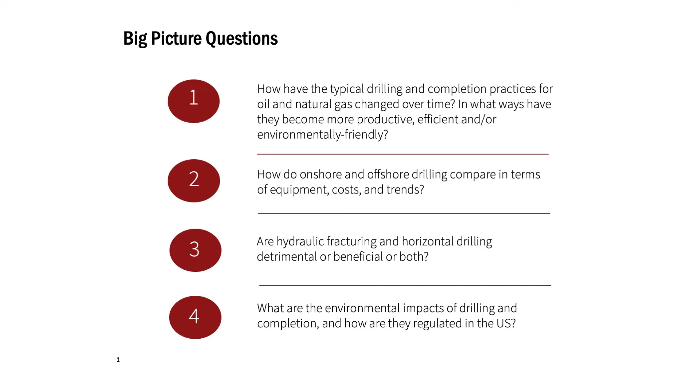So these are the kind of questions that we want to ask. Certainly, environment is front and center. Understanding and contextualizing where drilling takes place in the world. And we've already talked about the fact we're the largest consumer and largest producer of oil and gas in the world. So it makes sense that a lot of the action around drilling and the environmental impacts are in the United States. Not completely, but the good news is today we have really rigorous regulation. Staffing it, like everything else, is not always what we'd like it to be.

And we're going to dig in and look at the offshore environment. So this is talking to kind of contextualize, who are the players? Because there's different roles. Some of you have heard of companies like Halliburton and Schlumberger. When I was growing up in the industry, we called those service companies, oil field service companies. They really focus on the completion side of things. There are companies that just specialize in the drilling, so BP or Exxon might hire them to be their drilling contractors. Nabors and Liberty are two examples of those kinds of companies.

So it's just segmenting the market a little bit, and then giving you a sense of globally who are the biggest global producers, in this case of oil, and ranking them and giving you a sense of things. I spend a lot of time in Oklahoma City, and there's a company called Chesapeake that doesn't even make the list here that is a big producer largely of natural gas. But this gives you a sense of some of the names, hopefully, that you recognize and who's relevant and important.

Also on this slide, we wanted to give you a sense of how many feet are drilled per well in the lower right. It shows you that horizontal well bores or directional well bores have much longer length to them, and a lot of that length is horizontal. Most horizontal wells start out drilling vertically, like 5,000 to 8,000 feet. And then I still can't understand, honestly, how the steel drill stem bends in the subsurface. But computers and physicists and engineers figure it out, and they have special motors on the drill bit that cause it to be steered, and sensors associated with that.

So we're going to talk about drilling now. This is Kemp Gregory, who leads Renewwell, which I mentioned before. He worked for Shell and is up in Alberta. It reminded me that I spent three winters on the Blackfeet and Crow Indian reservations managing drilling operations. I had what I called a spacesuit - I wish I had a picture of myself, because I could barely move in it. It was both for safety and because it was about 30 degrees below zero, super cold. So the environment of a lot of drilling activity, at least historically, has been pretty rugged.

One important thing to realize is that hydraulic fracturing has a nickname, fracking, which the coal industry put on it because it sounded a bit like another F word. That doesn't mean hydraulic fracturing is perfect, but from a technical point of view, what we've been doing - which Halliburton pioneered back in the late 1940s - is creating an artificial fracture system beyond what occurs naturally, creating permeability. Remember we talked about conventional and unconventional reservoirs. This is about the geometries of wells, not hydraulic fracturing itself, but I wanted to show the timeline. We first started hydraulic fracturing back in the late 40s.

We married the technology, and did it in vertical wells. But a big breakthrough happened in the early 1990s - I was in the gas industry at the time, and I actually knew the head earth scientist for Mitchell Energy. He called me and said, 'We've done it.' It was a really exciting time because they drilled their first horizontal well and combined it with hydraulic fracturing, like we showed in the Shell video. So this horizontal drilling phenomenon is about 30 years old - when they first did it, it was like the beta version.

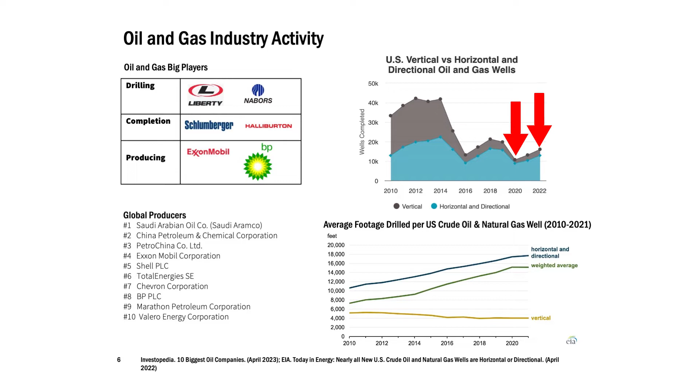It took a while to take off, but over half the rigs were going horizontal by 2008, and if you look at 2017 and beyond, we've been operating in a world where 80 to 90% of all drilling is horizontal. This is mainly because it has much less surface impact for the amount of drilling you need. In a vertical well, if you have a rock layer 100 feet thick, you only drill through 100 feet. But in a horizontal well, you can drill through a mile of it, since a common lateral length is about a mile. So the amount of reservoir you can reach is much greater with a horizontal well, meaning you need radically fewer wells. That's why we're drilling so many fewer wells in 2020 and 2022 than we were back in 2010 - horizontal wells are so much more productive that you need way fewer of them.

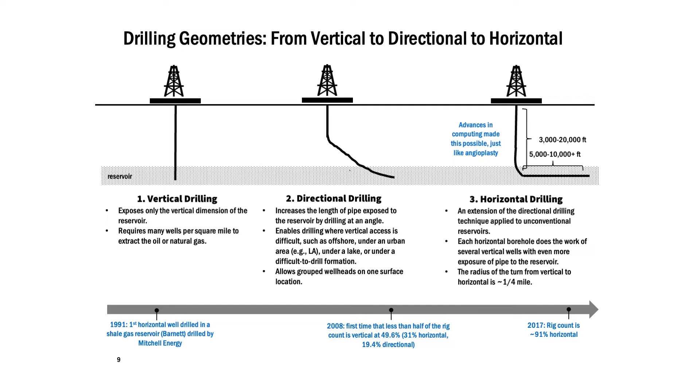One of the first areas we pioneered directional drilling was in urban places like Los Angeles, where there are literally buildings that at first you'd think are office buildings, but are actually cloaking drilling rigs that have directionally drilled wells under the city of Los Angeles.

The other place where we pioneered directional drilling was in offshore platforms, where we didn't at first go down vertically and go horizontal. What's allowed us to go horizontal is computing power and the ability to steer the bit, and to have sensors and controls and manage things.

The whole process of a directional well or a horizontal well, the pathway of that drill bit is highly regulated. You have to permit the path of the well, and if you go off permit, you have to stop drilling and go through the regulatory alignment, because part of it has to do with the mineral rights, and part of it has to do with just the management of the whole process. So it's very carefully monitored, not just at the surface, but in the subsurface. What's the pathway that well is going to take?

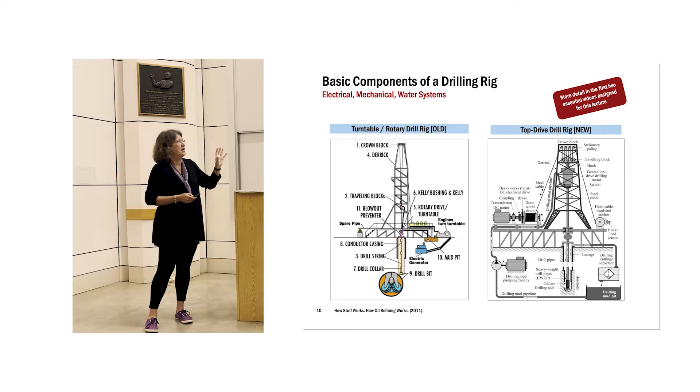So our main goal is that you understand these three different geometries of wells and how things have evolved over time. Drilling rigs haven't changed too much in terms of the fundamental systems. A new idea is actually putting the electrical in, and this top drive system is kind of an evolving technology that's here just for people who want to geek out on it, but I really don't need you to be accountable to know about it. But in the notes of this slide, it explains and reminds you what the fundamental systems of a drilling rig are.

How big do you think a drilling rig is for a reservoir that's at 5,000 feet versus a reservoir that's at 15,000 feet? Do you think the drilling rig would change size depending on how deep you have to go? The answer is yes, because the drill pipe is super heavy, and you need a bigger structure, just structural engineering wise, to support it. The deeper you're going, the bigger the rig you need, basically, to support all the weight you're managing of all the drill pipe you're pulling up.

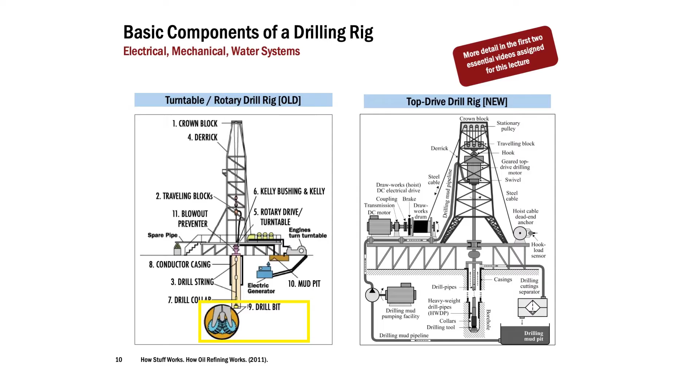So I'm going to start the process. You see it's highlighted, the drill bit. This tri-cone bit, the design of this was pioneered by Howard Hughes, who some people refer to as the Elon Musk of his day. Howard Hughes was into aerospace, medicine, the film industry, many, many things. But he is responsible for a lot of patents and designs around things in the oil industry, and Baker Hughes, some of you have heard of as an oil and gas service company, that's all tied to Howard Hughes.

Everybody, I've never had anyone get injured as we pass this around class, so let's not have it be today. But the idea, as Justine's showing, is...

The drill pipe screws into this bit, and the drill pipe is hollow, and the drilling mud is going at very high flow rates down the drill bit, helping keep the bit cool and lubricating the bit and helping move the cuttings up to the surface. And so that tri-cone bit gets very, very hot because it's grinding through rock.

When you think of the economics of drilling, and this could be for geothermal, oil, gas, drilling wells for water disposal, or for carbon capture, you want to make hole. You want to drill as quickly as you can without any kind of structural or mechanical failure. And so drill bits are really important.

When I was out in the field, 30 plus years ago, if you were drilling, you would buy the bits, and then when the bits became ineffective because the rock layers change and you didn't have the right bit type, you'd have to pull the bit out of the wellbore—that's called tripping the bit—screw on a new bit, and go all the way back down with it.

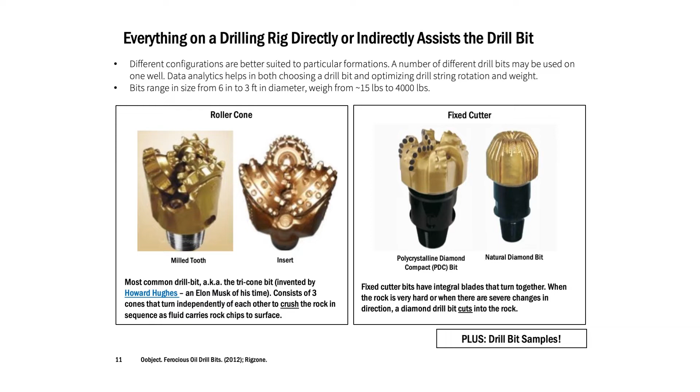So there's a little bit more. There's the bit on Howard Hughes. There's a fair bit about him in the notes. This is just highlighting that there's different kinds of bits. I'm not holding you accountable to know a lot about drill bits. It's mainly just to recognize that if you want to drill for geothermal, if you're working for Fervo, or if you're working for Chesapeake or Devon - and for Nate, who's from Oklahoma, Mitchell Energy is based in Texas, it got acquired by Devon, that's in Oklahoma City. So along with Chesapeake, Devon and Chesapeake are the two big operators based in Oklahoma.

There you go. What's class without a really cute little animation showing you the circulatory system? And again, on this slide, for your benefit, there are a lot of notes about this that are really just there to help you, not that we're going to be testing you on. But the thing that is relevant about drilling mud - it was a big wake-up call to me as a petroleum geologist when I went out to well sites, and there was a mud engineer and a mud logger, and I was like, what's this mud stuff? Drilling mud is basically water with very specially designed clays in it that help accomplish all the things you see here.

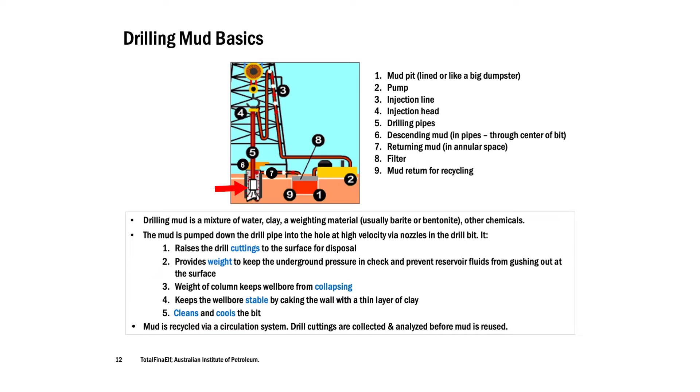So we want the fluid, which looks kind of like chocolate milk, but much thinner, actually. We want the drilling mud to be able to carry the cuttings up to the surface as the drill bit is working its way through, because the more efficient - here's the drill pipe, the drill bit is at the end of it. The fluid's coming down the middle, the inside of that pipe, and then it's pushing, and the bit's grinding away, and then the drilling fluid comes back up outside the drill pipe, circulates back up, and you want the density of that fluid to be such that it will carry the cuttings up without things getting clogged in the hole that you're drilling. So that's part of how the mud's designed, and getting the weight of the mud's important, and the drilling mud helps prevent the hole that you're drilling from collapsing in on the drill pipe. So it keeps everything stable and cleans and cools the bit.

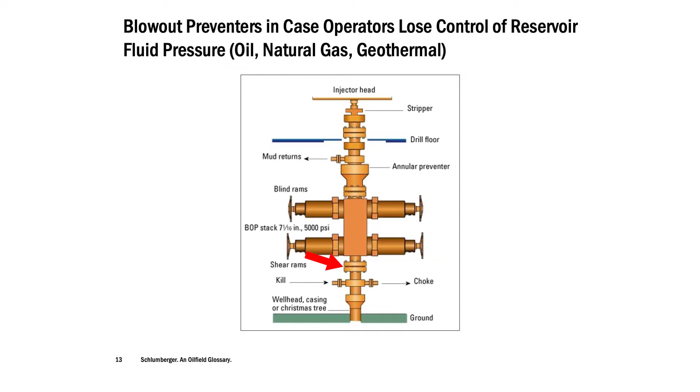This is a really important piece of equipment that we didn't always have historically, called a blowout preventer. Blowout preventers are essential. Every wellhead in the United States that's modern, active, recent, drilled in the last 30 or 40 years has blowout preventers - it usually has at least 3. A few of them are shown. There's blind rams, there's shear rams. So it's all part of this Christmas tree stack, if you will, that you have to have those in place as you're drilling to prevent it.

We have blowout preventers to manage the fact that, as we talked about on Monday, we really don't know what we're getting into in the subsurface. We don't know what to expect. We try and gather as much information as we can, but sometimes you drill into a zone that has unexpected levels of pressure, subsurface pressure. And when that happens, you can lose control of the well. So the blowout preventers are there to prevent a blowout, just like it sounds. Sadly... but 99.9% of the time, these usually three different layers of blowout preventers prevent anything from happening.

But there was, in 2010 - we'll talk more about it - the Deepwater Horizon BP spill in the Gulf of Mexico, an example because we have blowout preventers in the offshore environment too. The reason for that spill is the blowout preventers failed, and it resulted in a very large spill. A low frequency but high impact event took place, with the blowout preventer being at the root of it.

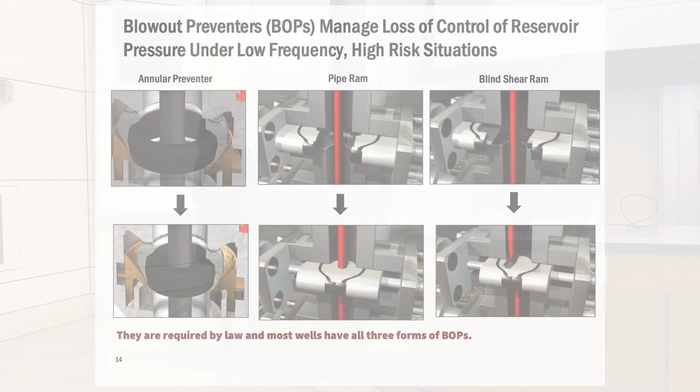Just going back to geothermal, which you're going to have a dedicated lecture on - and we'll refer back to oil and gas when we do it - there are blowout preventers when you drill geothermal wells as well, because of some of the same risks. This is just showing three different flavors of blowout preventers.

You're not held accountable for them, so I'm not going to get into them. It's more to make the point that there's a lot of regulation around blowout preventers and how big and strong they need to be. Every oil and gas company that's going to drill has to make the case and show a lot of research of what they think they're going to encounter, and then they size the blowout preventers, boosting the capacity above what they think they might encounter.

Our main issue here is with wells older than 40 years old, where we didn't do this telescoping casing the way we do today. This picture is important to highlight the difference between drilling and completing. When I was growing up in the business, they kind of all felt like the same thing, but they've really become segregated now with horizontal drilling and large-scale hydraulic fracturing.

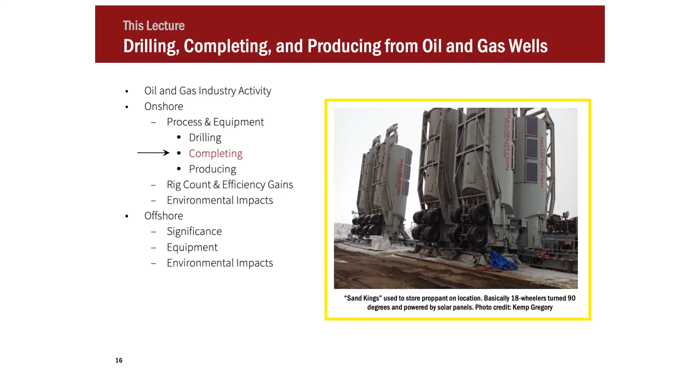Drilling the well tends to be about a third of the cost, and completing the well - the perforations, the hydraulic fracturing, and bringing the well online - tends to be about two-thirds of the cost. There's something called a DUC, which stands for drilled but not completed - or drilled uncompleted well. That doesn't quite make sense because you'd think that would be 'DUW,' but a DUC is one of the things the industry looks at.

Think of inventory management and just-in-time management of a supply chain - the industry changed from how it had been for a long time, about 10 years ago, when they realized they could drill the wells but wait to complete them until the price of gas or oil was attractive. They could bring in the drilling equipment, drill everything, wait a certain amount of time, and then do the completions. So the inventory of DUCs out there is something oil and gas price analysts look at, because that's production that can get brought on pretty quickly - as the video showed, completing the well, even though it's two-thirds of the cost, is a much shorter time frame than drilling the well.

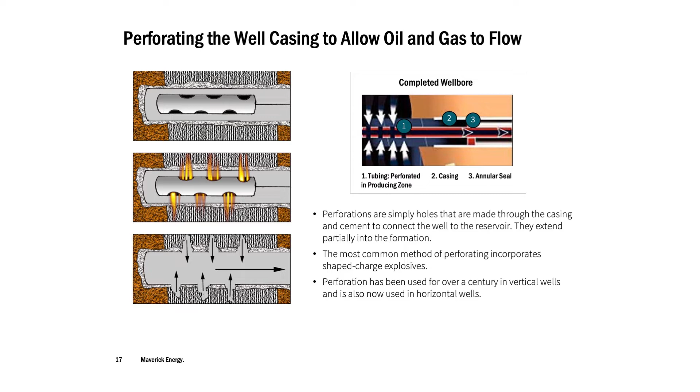This is just an elaboration of what you saw in the video. There are perforating guns that basically set off charges once you've set casing in the well. These charges punch through the casing and create the openings through which hydraulic fracturing can take place and where the hydrocarbons can flow into the wellbore. In the notes, there's a little video that elaborates more on perforations.

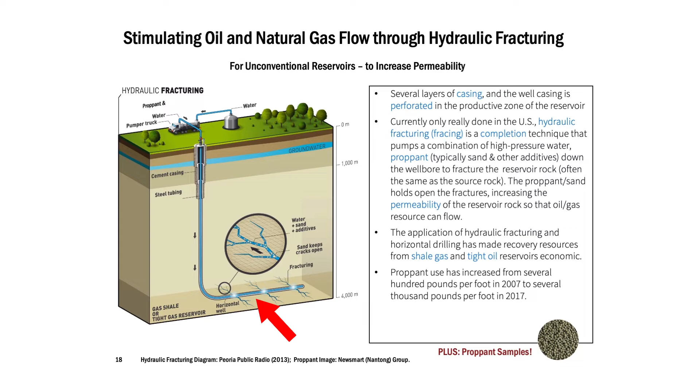You see the telescoping casing at the top, and you see the horizontal leg, the lateral of the well, and the hydraulic fracturing. My goal is just to show you many different ways of basically the same thing, and we're actually going to talk about it even more on Friday.

I think I touched on the fact that the first place where this was applied horizontally was in something called the Barnett Shale in Texas, and Mitchell Energy, who was later acquired by Devon, were the people who first pioneered this. Again, it opened up what we view as the hydrocarbon source rocks for natural gas, these shales, and it turned the source of the gas into the reservoir for the gas if you drilled horizontally through them.

And hydraulically fracked them. So this is what we call a Christmas tree, and this is what's left. In the Shell video, it showed these. So when you moved all the equipment, you put a big stack of valves. This is basically a cartoon picture and then a real picture of what a Christmas tree looks like.

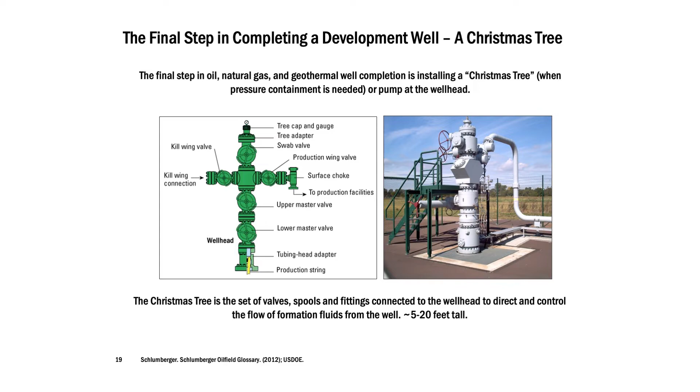Depending, again, the smaller the well, the smaller the Christmas tree, the deeper the well, and the bigger the flow, the bigger the Christmas tree you'll have. Some of the valves are there to manage production and to keep things under control. This is post-drilling, post-completion, and this is a situation where there is natural flow.

And if you went to the Geysers, which is the biggest geothermal field in the world, you would see many Christmas trees like this as well. 20 years ago, these were manually controlled. Today, they're completely automated in terms of controlling flow rates.

And if you went to San Ardo oil field, which you'll see some pictures of, or any oil field in California, most of those wellheads have pump jacks on them. They're going up and down, and they're lifting oil out of the ground. So in the absence, if things are flowing naturally, which does not happen in all cases, you would just see Christmas trees like this. That's part of the end game of oil and gas production, is seeing assemblies like this on the surface.

So this is a reminder that oil occurs in rocks that pretty much look like bricks. It's like, how could we possibly get hydrocarbons out of this? This is why hydraulic fracturing and horizontal drilling and hydraulic fracturing has been so effective.

We're going to talk a little bit about production. So this is a good one, just a reminder. I get asked very frequently, so if we produce oil out of a reservoir, why isn't there subsidence?

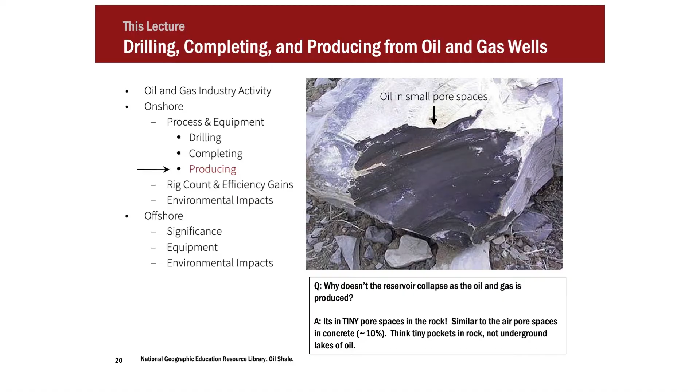It's because in most cases the reservoir rock is very rigid. We're only getting 10 to 30%, if we're lucky, of the oil that's there out of place. It's very unusual to get more than 30% recovery. So that's why we don't have very much subsidence. There are a few fields where there is, but it's very much the exception rather than the rule.

So I'm taking you back to the two P's, porosity and permeability. It's a really important part of the story of how production works. So why do we only get a quarter to a third of the available oil in the rocks out? These are the five reasons.

So capillary forces, which for those of you that ever do dishes, you have thought about capillary forces before. If you have something really good, a sauce with a lot of oil in it, to overcome the capillary forces, you need heat, you need hot water, and you need soap.

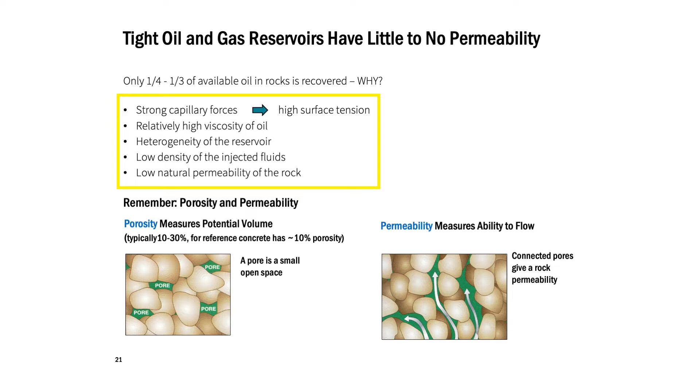Soap is basically a surfactant in the land of getting oil out of a reservoir. Those capillary forces and high surface tension mean that big fat oil molecules don't unstick from the reservoir very easily. The oil tends to be pretty viscous, the reservoir is heterogeneous, and the density of the fluids you inject to push more oil or gas out tend to be low density. So these are all the reasons we have low recoveries.

At San Ardo oil field, where I wish we were going this quarter, and hopefully we'll go in the spring, the oil is almost the consistency of peanut butter. It does not flow, or at least really heavy molasses. So in a lot of cases oil just does not flow very well.

This is highlighting the steps in oil recovery, much more focused on oil here. The primary recovery, when you drill and you find oil, what comes up naturally really is primary recovery, and it tends to be in the range of 12 to 15% of the oil in place.

It's just natural flow or artificial lift, which is a pump jack, which we have elaboration on in our notes. Secondary recovery, a really good example is Prudhoe Bay up in Alaska, where there's oil with associated gas. There's no market for the gas, so they re-inject it in the field, and it enhances oil recovery. Injecting water, which is wastewater and in no way potable, is another example. Sometimes produced water just gets re-injected, and that helps maintain reservoir pressure. That's secondary recovery.

Then there's an area where we've learned the most so far. It's changing rapidly because we're thinking about carbon capture, utilization and storage differently now than we were until now. But the pioneering area of carbon capture, utilization, and storage was enhanced oil recovery.

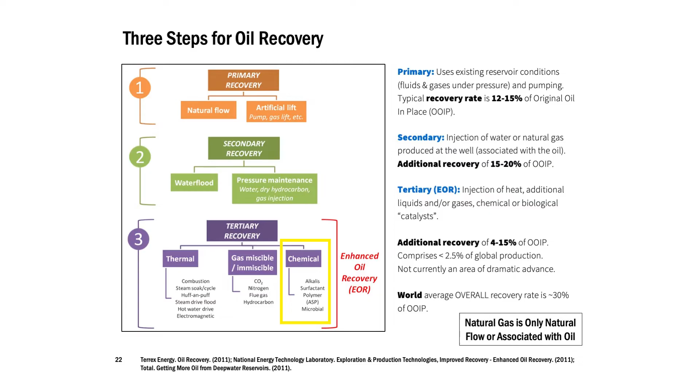One of the most common ways we enhance the recovery of oil above 20% or so, certainly in Texas, is injecting CO2, which helps push oil out that otherwise would not move. In California, we use thermal recovery, injecting steam into the reservoir to push more oil out. And in some cases, surfactants, basically like soap, get injected into the reservoir, just like doing dishes, breaking the surface tension and moving some of the oil out.

This is showing you a pump jack and how it lifts oil up out of the well. It's a wonderful animation you can spend more time with; it's not a good use of our collective time to dig into it right now. Certainly in heavy oil fields in Texas, Oklahoma, and California, pump jacks are part of the landscape, going up and down like this. The pumps are usually run off electricity, so that becomes part of the embodied energy of getting oil up and out of the ground. People are always curious about how these work, and the notes on this slide give a lot more information than I'll spend time on right now.

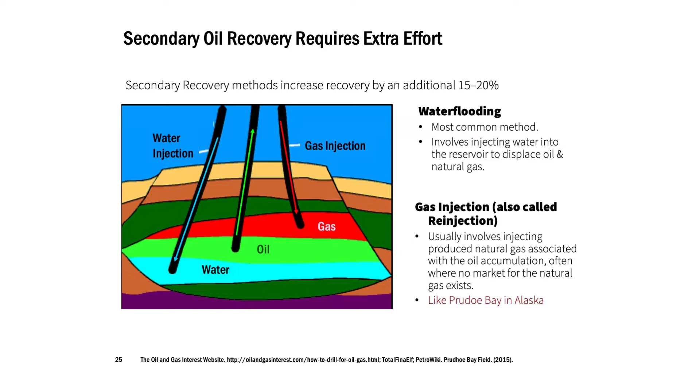This is an elaboration on gas injection, or secondary recovery, again with Prudhoe Bay being a famous example. This is meant to contextualize, and we wish the global data was more current, but this is the best we've been able to find.

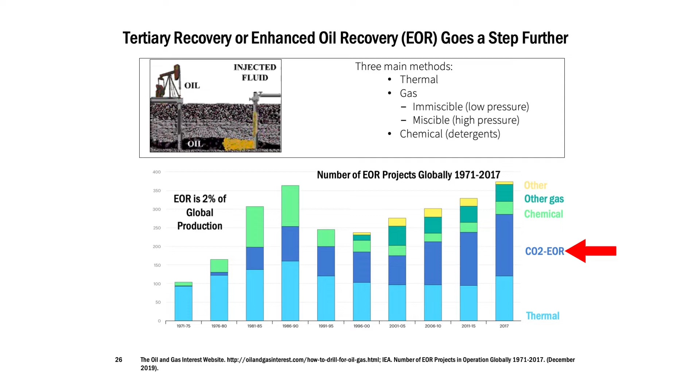It shows you worldwide that enhanced oil recovery, EOR, and tertiary recovery are the same thing, and 2% of global production, which is pretty small, is coming from EOR. Within that, CO2 injection is number one, a lot of that in the Permian Basin in Texas, famously most stewarded by Occidental Petroleum, which is one of Warren Buffett's favorite companies.

There's a very impressive woman who leads Occidental, and they most recently, just in the last few weeks, bought Carbon Engineering, a very visible direct air capture, or DAC, company. They're capturing CO2 from the air, using it and injecting it to get higher recoveries from oil fields. They're playing out a pathway that we as a society are trying to figure out: can they produce net zero oil, having captured enough carbon to offset what happens when you burn the oil they produce? It's still being figured out. We have a few slides on that in a moment.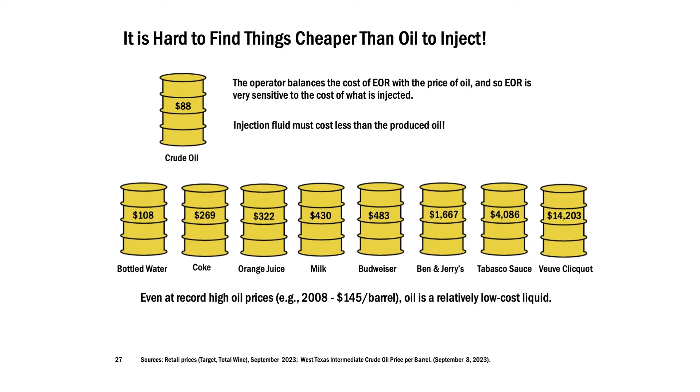In California, 55%, over half of oil production, comes from steam injection. In this field, which I have pictures of in a moment and usually take students to but couldn't this time, they would not be recovering any oil out of the ground if they weren't injecting heat into it, in the form of steam. In San Ardo, they have two very large combined cycle gas turbine power plants that generate electricity on the surface. They take the waste heat to make steam, inject it into the ground, and it enhances the production of the oil.

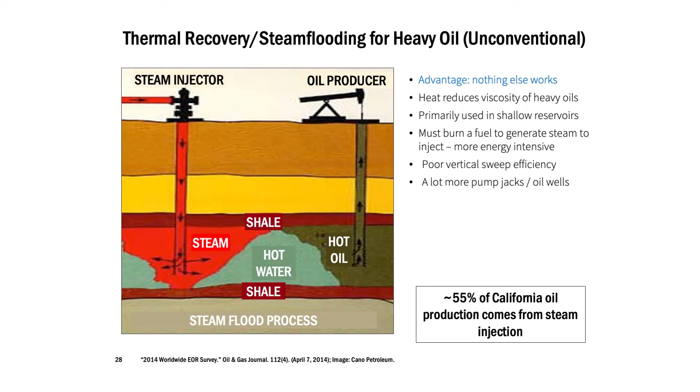That's a look at what the San Ardo oil field looks like, about 2.5 hours south of here, that we often go to. This is an old field, developed in the 40s and 50s for the most part. Because the oil is so dense and thick, the wells have to be really close together since it can't flow very far, and there are a lot of pump jacks. This is not a recipe for people to look at and say, wow, that's cool—there's a lot of impact on the surface. But it's 1 billion barrels of oil, and it's here versus somewhere else. Until we figure out how to move our transportation to EVs, transport less, and use more bicycles and things like that, this is a legacy asset, and it's really interesting to see.

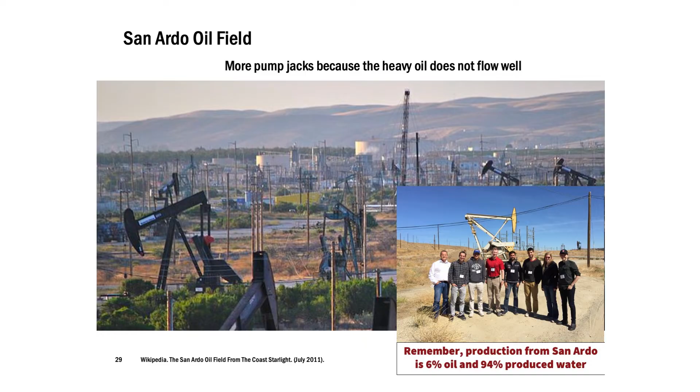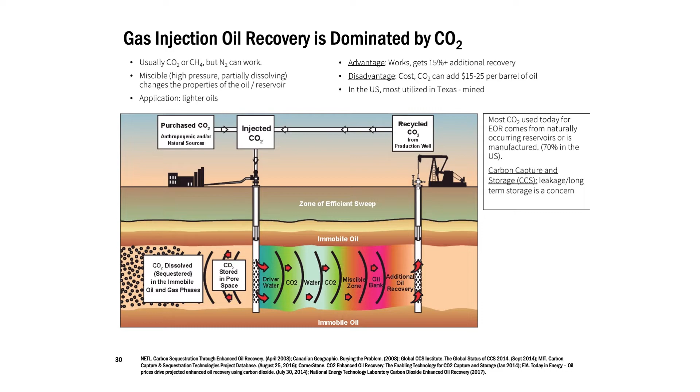Only 6% of what comes out of any producing well is oil—all the rest is ancient water. So for those of you interested in water, it's basically, for civil engineers, a big water treatment plant. And folks, that's 6% oil. For the class, this is just another view of what gas injection oil recovery looks like, and this is what Occidental and a handful of other companies are doing, largely in the Permian Basin.

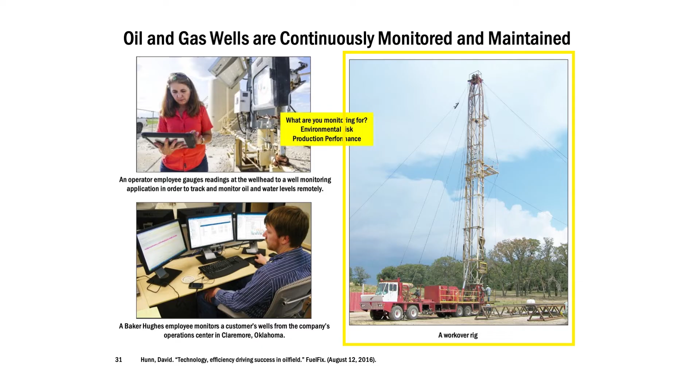A key thing that's happened—when I first started going to San Ardo 40 years ago, but I'm only 39—there were thousands of people working on that oil field. Today there are only a few hundred. Like so many other things in life, it's been automated a lot, and they've taken environmental stewardship and safety more seriously than in the past. A key point for anybody in oil and gas or geothermal, anything in the subsurface: our ability to measure and monitor continuously is very high compared to 10 years ago, and a lot of that goes on. A workover rig feels to me metaphorically like when you remodel your house—you have good plumbing, but sometimes things don't work out, so you call Roto-Rooter. Workover rigs come in, work over existing well bores, and clean them up.

There can be debris in the well that affects its production levels, and that differs a great deal based on the nature of the reservoir. So at San Ardo, there are a lot of workover rigs that come in and basically clean up and remediate existing wells. An important part of the story, when you think about production and completion, and why DUCs are relevant,

is that if you look at the upper graph, in the first 4 years, look how steeply your production declines. So if you have 4 BCF of gas, you're much more interested in bringing that well online when it's $4 an MCF than you are when it's $2 an MCF. That's the nature. What happens when you hydraulically fracture a well? You get a lot of gas at once because all that gas has been trapped in that impermeable rock, and then it declines on a very hyperbolic decline.

So timing when you bring production on, unless you really have a long-term view or a hedging strategy for your production, they all factor into that. So at the top is showing you what it looks like for an individual oil or gas well, in most cases one that's been horizontally drilled and hydraulically fractured.

The lower graph is interesting to me because, although we haven't been able to get an updated version of it, it still signals the idea: each color band is a vintage of production that was added in a certain year. So if you think of the United States, how much gas did we add? The total production is the top of the curve, but each vintage is on decline.

So if you want to maintain production, you have to keep drilling to replace the decline that's been going on in the prior years. That affects your thinking. Remember we learned about reserve to production ratio? This is another dimension of thinking about how much drilling you need to do to replace the decline going on in the wells you already have, if your goal is to maintain production.

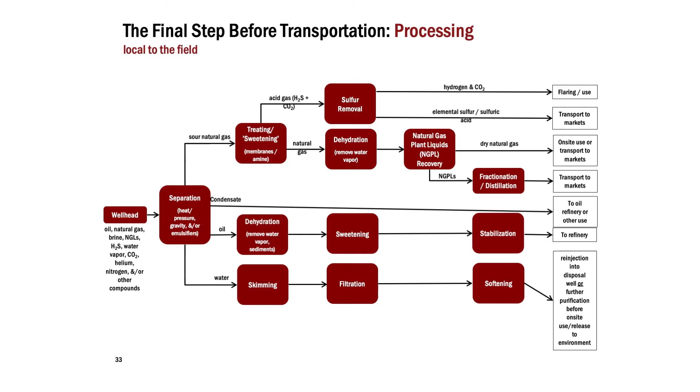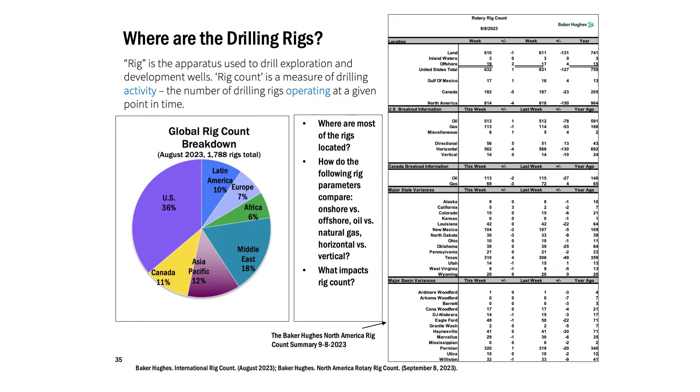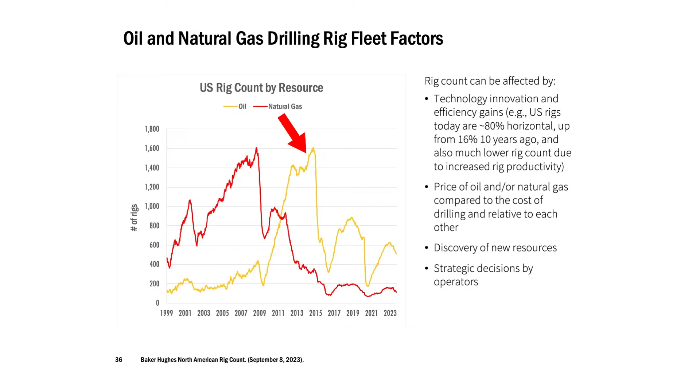This is showing the path of how many oil wells and natural gas rigs are operating at any given time in the US. The price of gas is pretty low right now, and the price of oil is pretty high, so that's why we've seen the rig count for oil pop up a bit. But it's nowhere near what it was 10 years ago, when there were many more rigs operating than there are today.

It's much less invasive. So we have one pad for 16 wells now, with very high recoveries out of horizontal drilling, whereas traditional vertical wells meant we had to have all these holes in all these pads—it looked more like San Ardo. We would never create a San Ardo today, given our ability to drill horizontally. So that's a legacy field.

The argument I like to put in front of people is, in a world where yes, we would prefer everything was non-fossil, but as long as we are using natural gas to help enable renewables, because it backs up renewables, and as long as we're using oil until we get the EV supply chain figured out, it's better to be doing horizontal drilling and hydraulic fracturing, from my point of view—that doesn't mean it needs to be your point of view—than it is to be doing it the vertical, open heart surgery way we were doing it in the past.

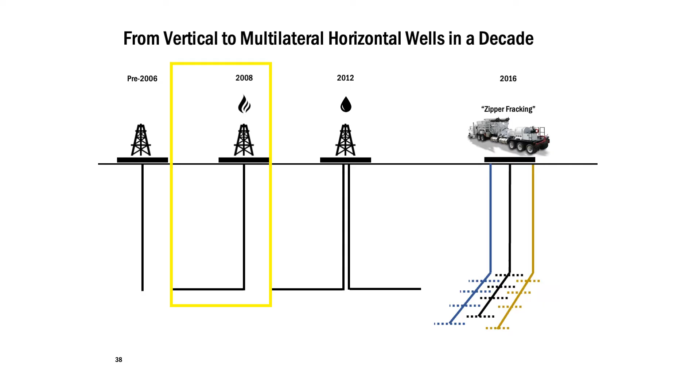Noting that we went horizontal first for gas in 2008 on a pretty significant scale, and it was only 4 or 5 years later that we opened up tight oil resources like the Bakken in North Dakota, which nobody imagined we would do before 2000. So it's just to give a sense of timing. Oh, there are those zipper fracks.

I like to use this because I'm going to give you a wind lecture in a month or so. I was around, you guys—I was in Stanford Business School in 1985 when cell phones looked like that. We called them cell phones then. They did not text, they just did one thing, and they cost $5,000, okay? So we still call that a cell phone. Where is my cell phone? Here's my cell phone. We call this a cell phone too, but it's really different.

The reason I make that point is a well from 1930, or 1960, is really different than a well today, but we have this legacy issue. Those phones are not a big legacy issue—the old oil and gas wells are a legacy issue. In the wind lecture I'll show you what wind turbines looked like in 1983, and they were super hokey compared to the amazing wind turbines we use today. But we still call them wind turbines and count them, even though they're very different things technically.

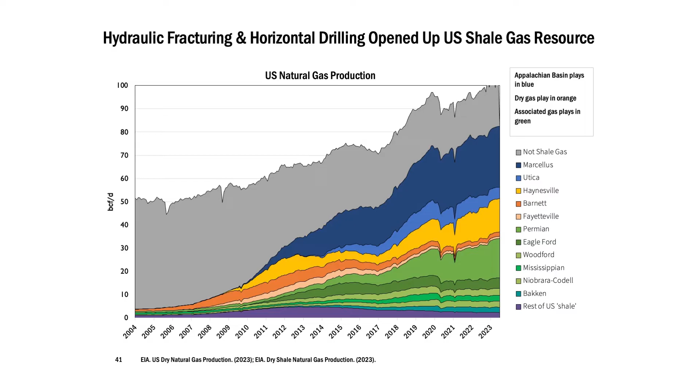And just showing you how they've grown. That's gas. So this is another way of looking at the 3 regions that account for most of the gas production. We're still on gas, so we're going to look at it. I'm going to go back. Here we go. So that's looking at it with really pretty colors and breaking it out into more detail.

If you look at it here, the Haynesville is in Texas and Louisiana. The Permian is in Texas and New Mexico. And Appalachia, the prime states for production there, are Pennsylvania and West Virginia. So then there's the rest of the United States.

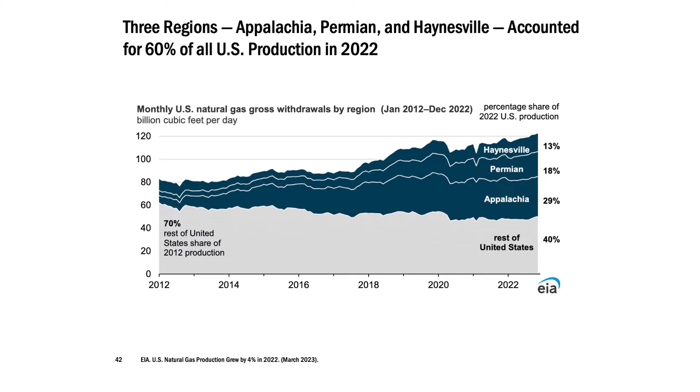So you kind of get a sense of, well, where's our gas coming from? That's the goal, and how it's grown, and why the US—we were importing natural gas, we were building LNG facilities to import LNG from other countries, and we actually repurposed those facilities so that we could export LNG because of the shale gas revolution.

So now we've got oil. This is tight oil production. It says it opened up the resource, but this is not the resource, this is the production. It's showing you the importance of the Bakken, which is the kind of brick color, third down. The first couple on top, the Wolfcamp and Spraberry, those are in the Permian Basin. So you see the role, how significant it's been since 2010 in terms of our horizontal drilling and hydraulic fracturing.

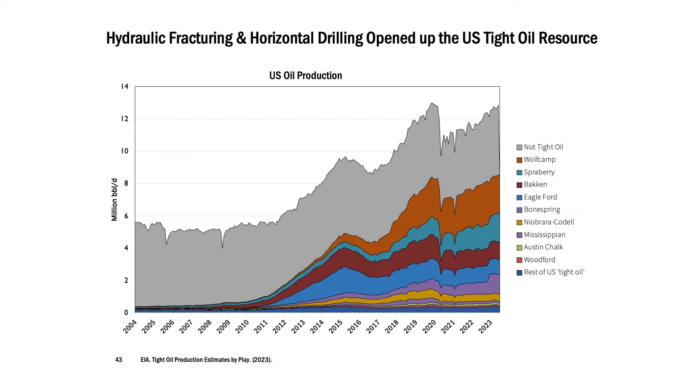So that whole phenomenon is like 13 years old. And we were a pretty significant importer of oil in 2010, and now we're an exporter of oil. That's happened in 13 years. So from a national security point of view, that's a big deal. From dealing with greenhouse gases and pricing carbon, that's not what this is about, and we all know that's a super important issue. So this is giving you a sense of where does oil come from in the United States.

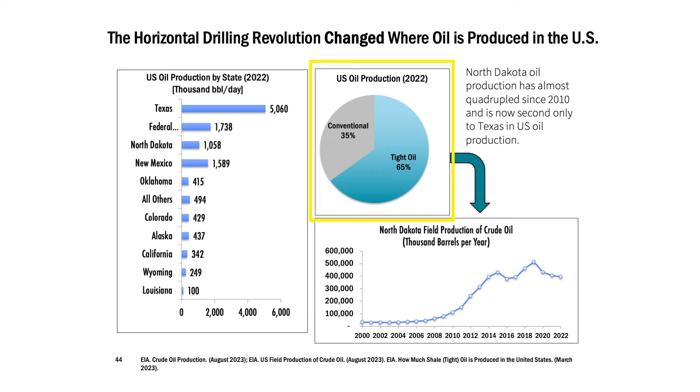So what does this cause, this transformation? So we got a bunch of challenges, actually. As I mentioned, we're venting a lot of natural gas to the atmosphere or flaring it. We don't have markets for it, and the regulators haven't clamped down on that the way they could, so it's putting a lot of methane in the atmosphere. It's great we have this tight oil, but that's something I'm most worried about out of all of this, actually.

We didn't have the pipeline infrastructure to move the oil, say, from North Dakota, so we put it on rail cars, and there were some spills associated with that. And the pipeline infrastructure that they want to build is disruptive, and it's hard to get—it's triggering NIMBY issues. Remember, BANANAs: build absolutely nothing anywhere near anything. So it's great we found this oil, but we can't move it to the market. So that's been hard, and there have been understandable protests about that.

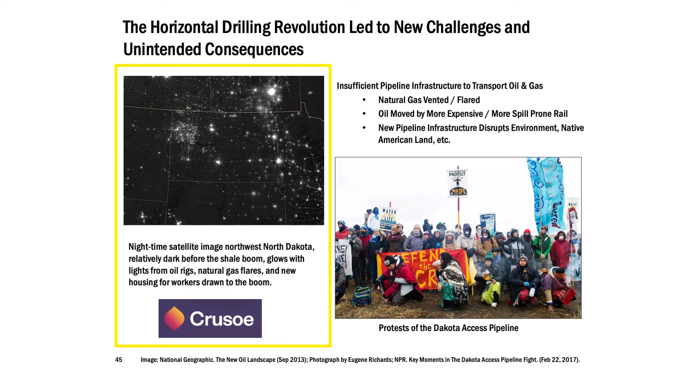And I mentioned the satellite view of the flares in North Dakota. There's a company called Crusoe that some of you may have followed that has said, okay, there's this gas that nobody has a market for.

We're going to set up right at the wellhead, practically, and we're going to take that gas that's basically free, and we're going to use it for Bitcoin, so to mine Bitcoin. So use it for something useful.

So Crusoe is an interesting company to read about if you've never heard about it before. It's important to think about what are the biggest issues: water use, water contamination, seismicity. My favorite, in terms of what's most important, is methane leakage and flaring.

Noise, traffic. One of the things communities care a lot about is the truck traffic, because the trucks bring all the hydraulic fracturing fluid and sand and things in. So it's very high impact, honestly, on a community for a short period of time.

So it's very common for communities to say, okay, we'll give you the social license to operate, but you've got to pave a bunch of roads for us when you're done. Or you've got to drill some water wells. They negotiate, you've got to build a school. So that's true of any resource development, but we've seen a lot of that happen with the shale gas and tight oil revolution. So it is highly regulated, but you can have all the regulations in the world.

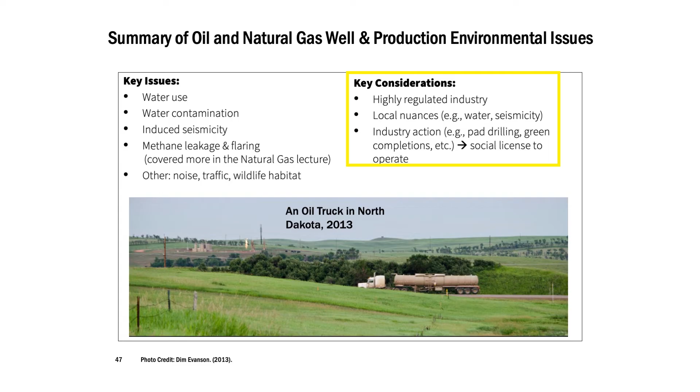If they don't get reinforced or enforced, that's an issue. And this idea of the social license to operate, whatever you're doing in the energy system, you have to have community support. And so companies have learned that if they blow it in one community, it follows them to the next one. And so they're better stewards today than you would imagine. And we still have the legacy issues.

So imagine in your paleogeology, imagine beautiful big sand dunes. Most of us have at least seen pictures of sand dunes with very high porosity. That's the kind of reservoirs they have in the Middle East. Not everywhere, but enough of them. So it's not all wells are the same.

So understanding the water side of things and the difference between produced water and flowback water. Hydraulic fracturing creates flowback water, and it tends to be a very small percentage of the water that we have to manage when we're doing horizontal drilling and hydraulic fracturing. The main water source that we need to manage is the water that's been trapped down there with the gas or the oil that comes back up. And that is where we've run into interesting challenges.

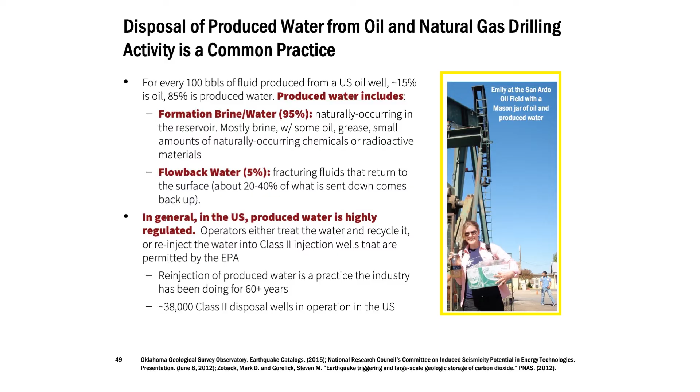Part of what's been the challenge is those wells didn't anticipate the increase in volume of injection into them that the horizontal drilling and hydraulic fracturing revolution has caused. And so notably in Oklahoma, this is a former student and TA and teaching colleague, Emily, in this picture, and this is a topic she's done research on and is very interested in.

This resulted, and Mark Zoback, who's an emeritus professor here in rock mechanics, was really the superhero, came in and figured out what was going on, because in Oklahoma, they were injecting into long-standing water disposal wells, but the rates of injection reached a point where it created pressure in a few of the wells that activated some deep faults. So just the rise in pressure of injection activated the faults. There was this rise in seismicity.

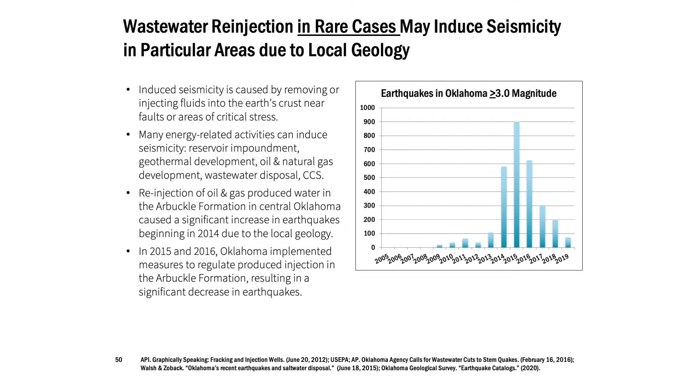He and his team, his grad students, understood it, helped inform the regulators in Oklahoma. They reduced how much could be injected in the wells that they could see were near these faults, and they raised the level of injection in the wells that weren't near the faults. And things have gone very smoothly since then. But managing all this is a part of the process of managing the brine, essentially, that comes up.

Now with an EV revolution going on, there's become interest in what about this produced water? Are there metals, minerals, things that we can extract that are useful for some of the other things we're trying to do in decarbonization?

So I think a lesson is that oil and gas are very related to water and water supply. There's a slide that highlights what daily withdrawals are - yes, this is 7 years old, and my colleague who's helping me update some slides, we just found some data to suggest that golf courses use about as much water as livestock does around the country.

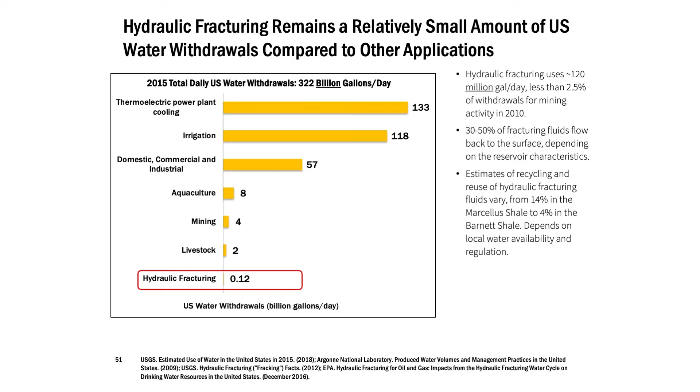You can see that hydraulic fracturing is using at least a certain amount. We need to see if we can get better data. But it's contextualizing what we use water for. We use water for lots of things, and most of the water being used - I want to check the New York Times article on this.

Under the social license to operate, most operators are creating a pedigree of where the water came from that they're using for hydraulic fracturing. And the ratio of repurposed water and non-potable water is much higher now than it was 5 years ago in the industry. So it's like so many other things around sustainability.

If we can create transparency, measurement, certification, and differentiation, we're beginning to create point systems where companies can say, 'Not only am I addressing my scope 1, scope 2, scope 3 emissions, but look at my water practices too.' So that area is just building out.

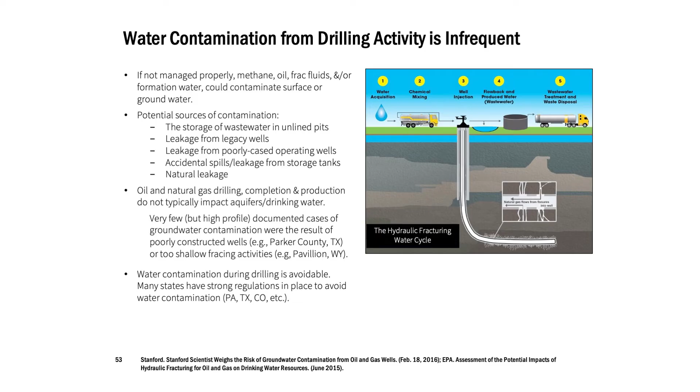So this is the contamination story - just making the point that those telescoping casings are supposed to prevent contamination, and the contamination issues we do have are largely a legacy issue. As it talked about in the video, about 0.5% to 1% are additives that go into the water, and then there's sand or artificial proppant that goes in.

Now there's total disclosure basically in every state with oil and gas production about what is in that 1% or 0.5%. In the beginning, when this kicked off, companies thought there was a secret sauce, so they didn't share it, and it created fear. Now everybody just shares it, and most people's secret sauce is about the same.

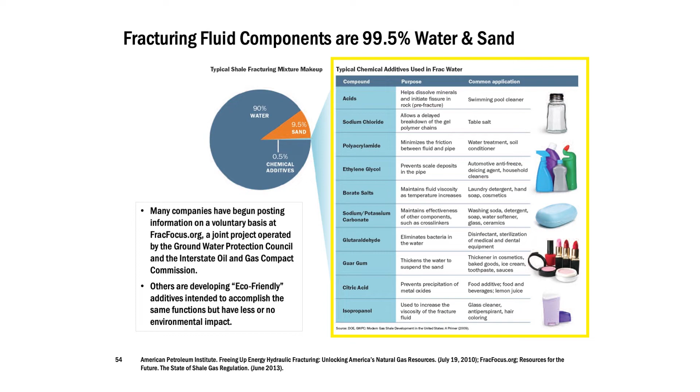The point of this slide is to argue that most of the things in there fall in the surfactant category - they're more like soap. They're there to help make things flow smoothly and get the proppant into the fractures. But the more disclosure and transparency you have, the more comfortable communities are about the risk and toxicity relative to other things in the industrial system. So it's not perfect, but it's made a lot of progress in the last 10 years.

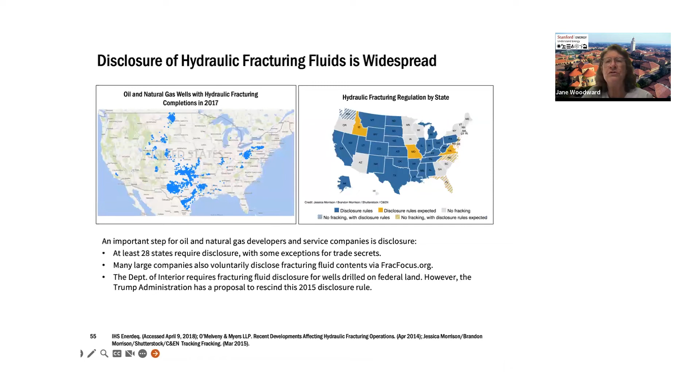So I mentioned disclosure - there are rules and voluntary efforts in all the states that have horizontal drilling and hydraulic fracturing going on. This is just to give a geospatial aspect of that. There's a lot of text on this slide, so I apologize, and we're going to talk about this topic more in the natural gas lecture.

An important concern of drilling and operating oil and gas wells is managing methane leakage. We historically have had trouble doing this because we couldn't see it very well. There's been a revolution in infrared cameras and the ability to measure, detect, and limit methane, which we care deeply about because methane is a very potent greenhouse gas - 20 times more potent over a 100-year period than CO2, and much more significant in the first 10 years, which is where natural gas is most present.

The Permian Basin, which is really the #1 oil producing region in the United States, has a leakage rate as high as 9%, which is higher than the average of 2.7 to 3%, and a 3% leakage rate across the whole system really negates all the greenhouse gas benefits of burning gas instead of coal. There are other benefits besides greenhouse gas benefits - natural gas does not have solid waste like coal does - but managing methane leakage is really important to the viability of natural gas continuing as a valuable fuel, for enabling renewables by providing stability to the grid and things like that.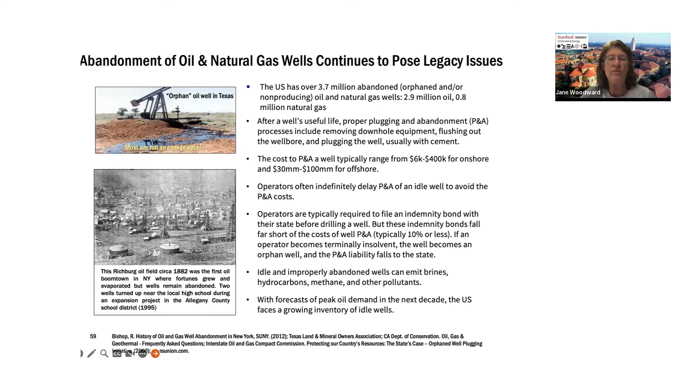But in a lot of ways, these represent big social costs that are being paid for, in many cases, with taxpayer dollars, rather than being paid for by the people that got the benefit of the oil and gas production in the past, both from profiting from its production or the ability to use those hydrocarbons.

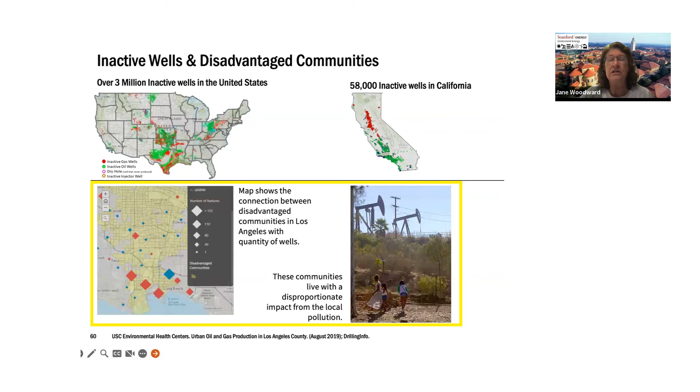One of the points to make as well is that, as is often true, the legacy of inactive mines and inactive wells in our country often correlates very closely with communities that are disadvantaged. So it was important to me to highlight this idea that legacy fossil issues correlate highly with disadvantaged communities. In this particular case, it's highlighting areas in Los Angeles.

There are private companies too. Renewwell, which I've mentioned earlier, is repurposing abandoned or inactive wells. Project Canary is a methane management company that several Stanford folks are involved in, really hatched out of the Stanford environment. And there's the whole question of the efficacy of gray hydrogen versus blue hydrogen versus green hydrogen, how do we certify that, and what are the impacts of all of those? That's something the industry and regulators are really working on, building trust around these different categories.

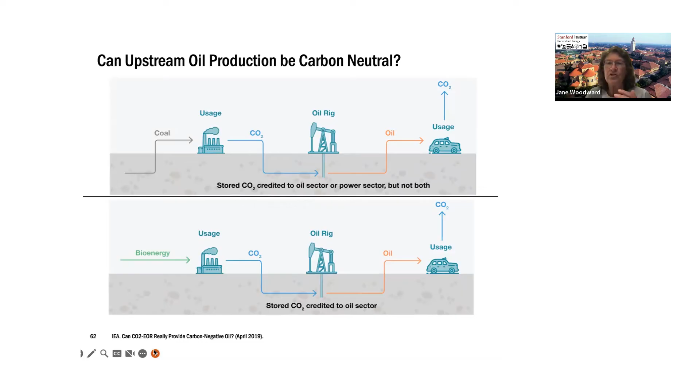This is an elaboration on one of those topics. In particular, Occidental Petroleum has a whole group called Oxy Low Carbon Ventures. They recently acquired Carbon Engineering, a DAC, direct air capture, company. They're working hard to try to get to a place of, as an oil and gas company, being carbon neutral by 2050. The whole certification of that is a very interesting new part of the oil and gas industry.

So just to summarize what's been going on in onshore drilling, completion, and production: a key idea is that things have been getting more and more efficient over the last 50 years, and they've been getting safer, both in terms of human and health risk, but also environmental impact, because the stewardship and the ability to provide transparency, measurement, certification, and differentiation between wells that represent good practices and wells that don't is building momentum right now. There's a ways to go, but we've been making a lot of progress.

We're drilling faster, we're going more horizontal, we have fewer wells and rigs needed, and we're increasing production. So there's a much higher level of efficiency, and things are becoming more standardized. Regulators and industry are actually working better together than they have in the past, and regulators are really digging in and saying, no, you can't drill or do this until these other issues get addressed, which is great.

We're shifting to the offshore. You were assigned a video about the Perdido, the largest oil platform in the world. For those of you who haven't watched it yet, I encourage you to do so. But at the highest level, one of the things to think about with this particular spar production facility platform is, imagine this: it's 200 miles off the coast of Galveston, Texas.

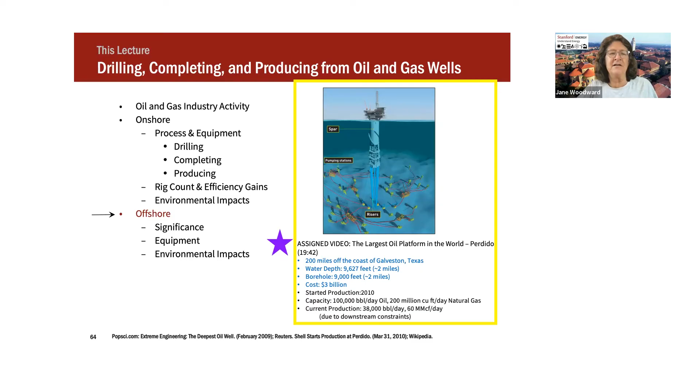It's operating in water depths of 2 miles, so almost 10,000 feet, and the borehole, the well bore, is almost 2 miles deep as well. So that's 4 miles of depth from the ocean surface, at a $3 billion cost. It's really quite staggering to think about operations of this scale.

With that, I want to pivot to thinking a bit about the characteristics of offshore drilling and production. Some key ideas: it's challenging and expensive. You have to have very elaborate guidance systems, and blowout preventers have to be installed on the ocean floor, often in situations that are anywhere from 100 feet to 5,000 feet, sometimes more, underwater, and sometimes, like the Perdido, closer to 10,000 feet underwater. So the pressures and forces, the physics of all that, are really quite intense.

In the US, offshore mineral rights are different than onshore. There's no private mineral rights; we have state rights for the first 3 miles offshore and then federal rights after that. Then we get into international waters, where generally there's a limited amount of oil and gas development, and it tends to be politically challenging to manage. A couple of key places where this topic comes up are the Northwest Passage and the areas of receding Arctic ice right now, but also the South China Sea, where there's ambiguity and friction around who owns what.

The return on offshore drilling is large, but the capital risk is super high. I tend to think of these as elephant resource opportunities, but they're extremely capital intensive to go after. This slide is really meant to frame key ideas, because there's a lot around what we've learned in offshore drilling and production that we can apply to offshore wind, which is really a new and important industry.

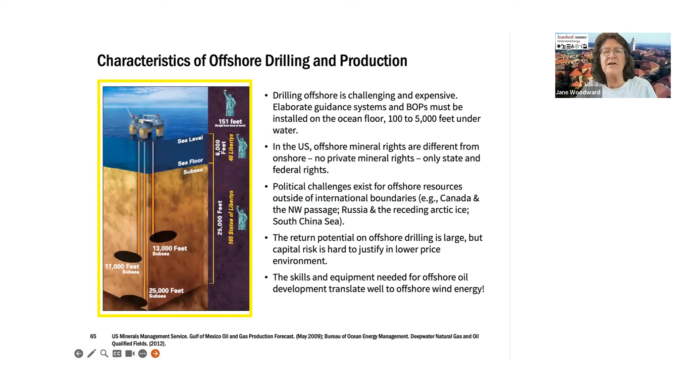So the diagram on the left is meant to give you a sense of the scale of these offshore operations. I want to highlight that the Bureau of Ocean Energy Management is the regulatory body for the United States for managing offshore oil and gas activity, lease sales, and also the organization stewarding offshore wind development and harvesting of battery minerals off the ocean floor. It's the regulatory body for energy development.

Let's get a sense of the significance in the United States of offshore oil production. It's about 30% of all oil production globally, and less than that in the United States. Here we're highlighting the oil production versus gas production in the United States, with the context that 30% of global production is happening in the offshore environment, really concentrated in about 5 countries.

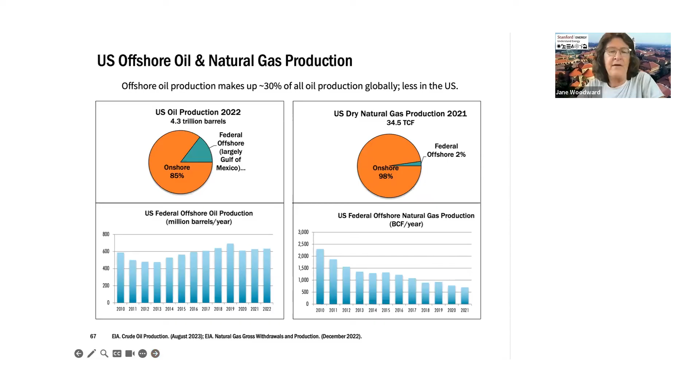So how we drill offshore, we use equipment like this, and the nature of the equipment we use, you don't need to get into in a lot of detail. The main point of this slide is we use different equipment in different water depths. You see the jackup rig in shallow water, the drilling barge in shallow water, upper left and lower right, and then we have the drill ships or the semi-submersibles in deeper water.

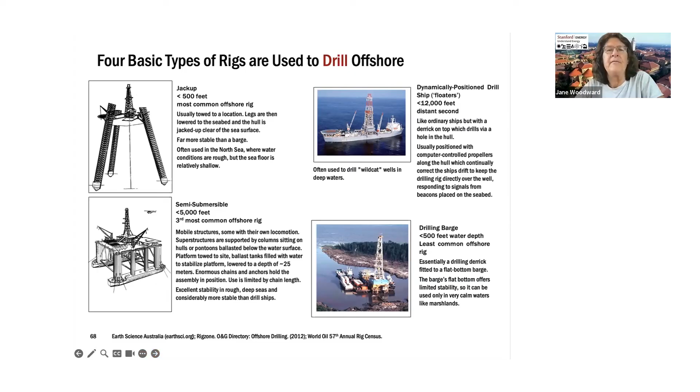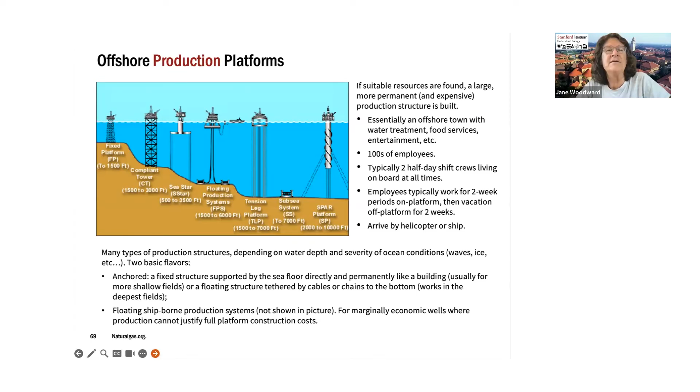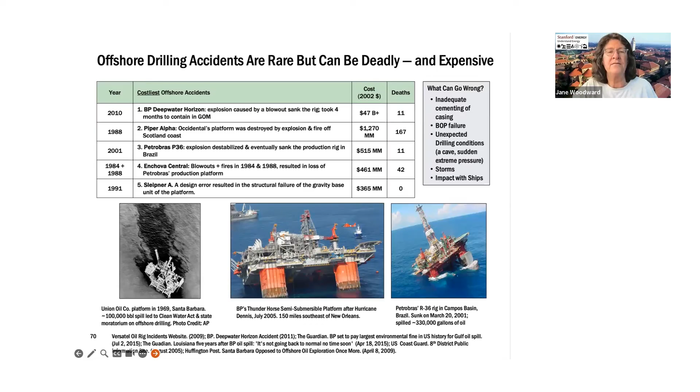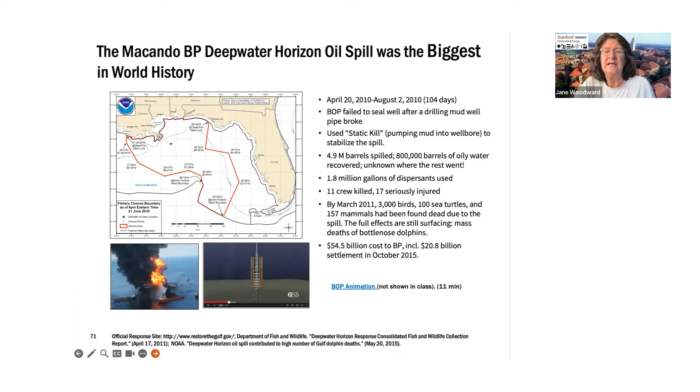And lots of species impact on birds, sea turtles, marine mammals, etc. So a big catastrophic event, which doesn't happen very often, but when it does, it requires a lot of regulatory and taxpayer response to clean up and address and deal with these situations. The settlement helped address some of this.

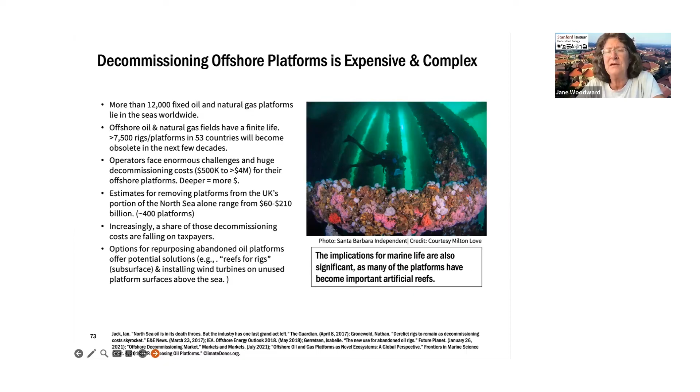In some cases, they plug and abandon the wells, cut the foundation of the platform, and tip it into the ocean, because there is such a robust man-made reef of wildlife that has grown on the platform, that rather than removing it, they simply permanently install it on the ocean floor. Obviously the bigger and deeper the platform, the more expensive it is to address in terms of decommissioning. But this whole idea of decommissioning onshore and offshore wells is becoming a robust area of stewardship, with oil and gas operators needing to participate in this process, and regulatory enforcement to make sure we're doing this in the most thoughtful way.

So to wrap up, we talked about the fact that oil and gas have similar drilling processes. About a third of natural gas in the U.S. comes from associated natural gas. The drilling processes and equipment we've talked about are very common to geothermal, and you'll see them associated with drilling wells for carbon capture and storage as well.

There's been a lot of innovation around hydraulic fracturing and horizontal drilling so that we can drill far fewer wells and have much higher recoveries, drill faster, and have things like drilled but uncompleted wells, so we can drill many wells from the same pad and bring them online and complete them when they're needed in the market.

Regulatory oversight, at least in the United States, which is what we understand best, has really risen, and has been established to provide communities with a comfort around the social license to operate. Staffing, which is true in banking and medicine and many other fields we regulate, properly staffing, motivating, training, and rewarding the regulators to enforce these regulations is an ongoing challenge. Encouraging public dialogue, which fortunately social media and other things raise issues quickly to the attention of regulators in manners that was hard to do before social media.